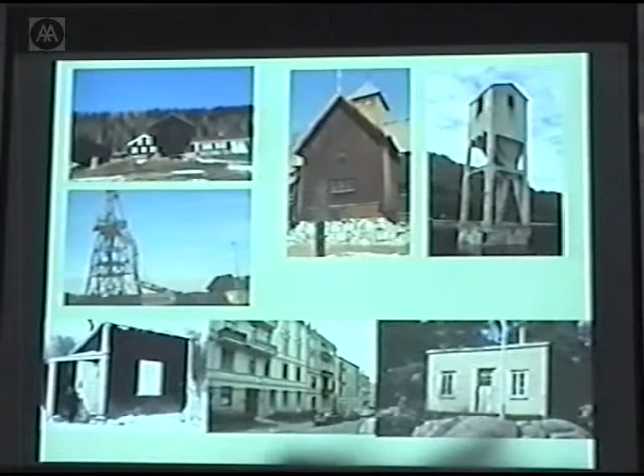I was told that I should tell you something about my background when I was going to give a lecture here at AA. And this is some of my background. On the lower line you see the street I was raised on, in the middle our family's winter cottage, and on the right hand side our summer house.

The other structures and buildings are buildings passing on our way to the summer and winter house. It's a traditional old storage house on the top left, a so-called stabbur, and a stave church in the middle. These two other structures are industrial structures. The one far right is a concrete outshipment silo in some way, and the other one is a broken crane.

Many of these projects I'm going to show you have relations to this old building tradition of Norway. It's a long tradition of building structures that can be torn down, moved to another place, and put up again without much harm.

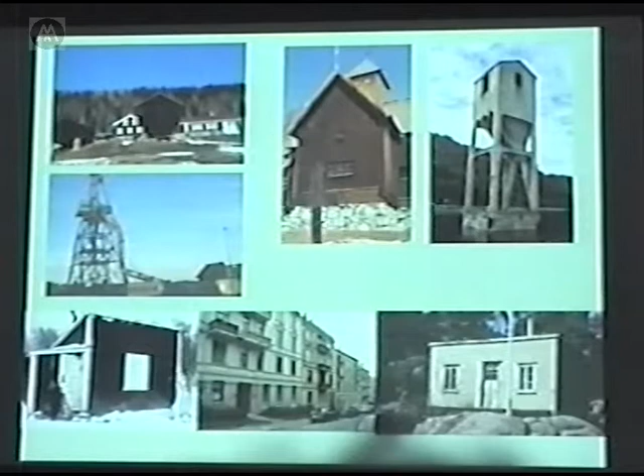After finishing school, I worked in New York for Bernard Tschumi. I came to New York as a photographer's assistant, worked at night and tried to get work during the daytime. And I started at Bernard's office.

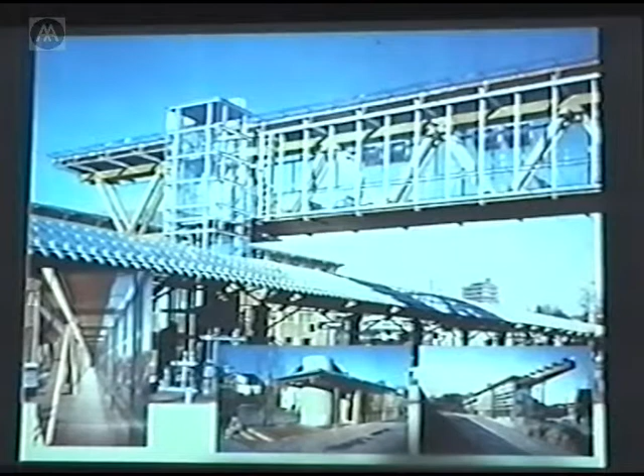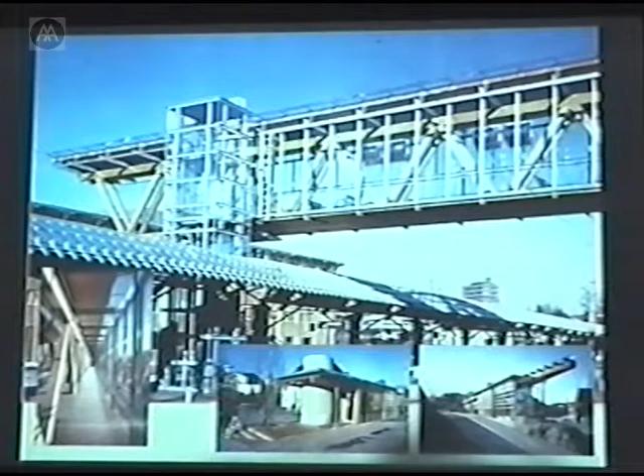Then I went home to Norway again and started working with Niels Torp. You probably know him from doing the headquarters of BA out at Heathrow. At both places I actually worked on communication centers and bridges.

Some students work for us, and different artists work and collaborate on different projects. The way I'm going to go through the projects is as a trip from the forests around Oslo and down to the harbor. It's a kind of sampling of our projects into sites that we think of as potential for building new buildings in Oslo.

It's a kind of clean cut through Oslo, from the forests surrounding the city down to the harbor at the end of this fjord. We're starting off at an old monastery up in the woods, and our idea is that we want to show that new pieces, new architecture, modern architecture, has to be put between and together with and besides the old stuff.

This is a kiosk, kind of a temporary building. It looks kind of temporary, but our suggestion is to make it more contemporary. So I'm going through some projects that we make as suggestions for these buildings and sites that we pass on the way.

This is a cinema for approximately 50 people that's been touring Norway, visiting 70 cities and places all around the country. It's hosted and run by one man who has a lorry where all the technical equipment is put in, and then a dome-sized pneumatic structure held up by air under pressure. It's very quick to raise, taking about an hour, and the same for packing it together.

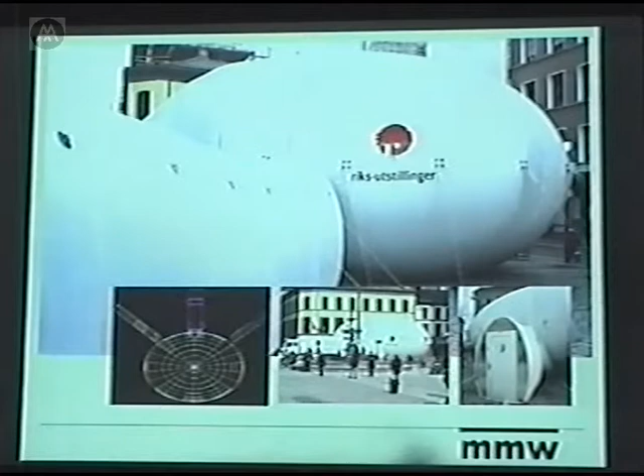Here is another project, an exhibition of our office projects in a gallery, where you're actually just visiting this pneumatic structure and never in the gallery itself. All our projects are projected on the inside of this fabric. This was the first project I did in collaboration with Helly Hansen, the cloth and seawear fabric company in Norway. In the 60s they made a lot of these pneumatic structures for tennis courts and skating rinks, but they hadn't been doing it since I started collaborating with them on this exhibition.

That exhibition actually transformed into a stage set for a new ballet with Norway's first prima ballerina, and we used the structure as a place to project pictures taken by a famous Norwegian photographer. The ballet was also going to tour Europe, so it was important that the stage set could be fitted into a suitcase.

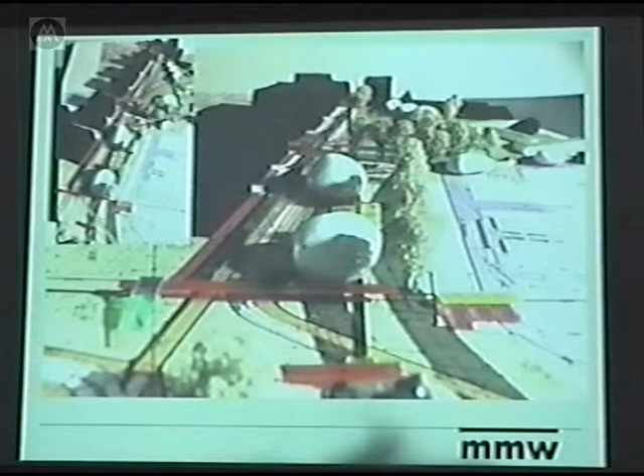This is the latest pneumatic structure we made, a smaller exhibition for the capital of Oslo. It's a kind of stand, a presentation of Oslo's environmentally friendly issues. There are six issues, and they are touring Europe with this exhibition. It's a projection of a video film on the bottom, and you have different tools you can operate inside this ball, with a sound connecting to each theme.

So these are our proposals for the new kiosk.

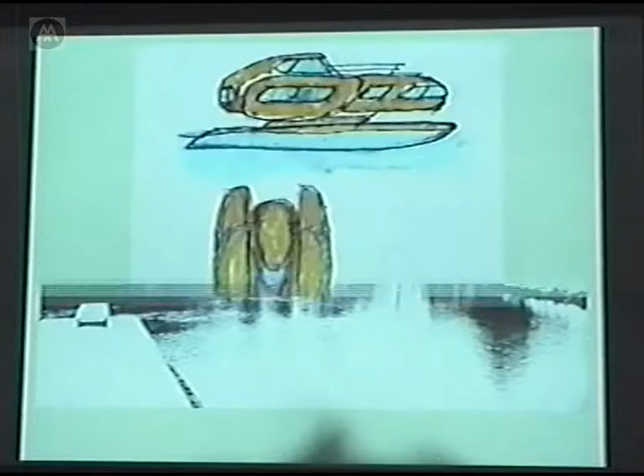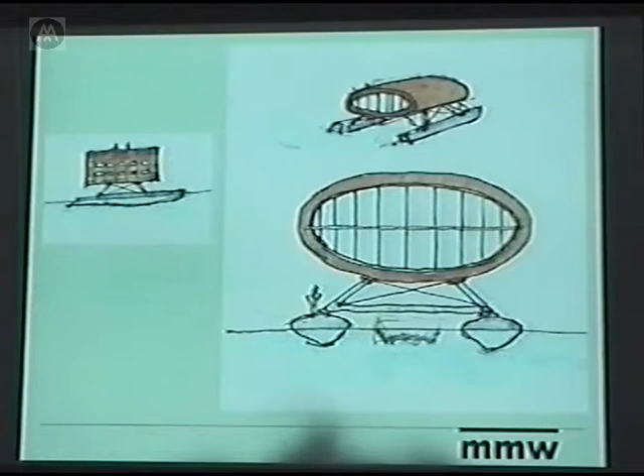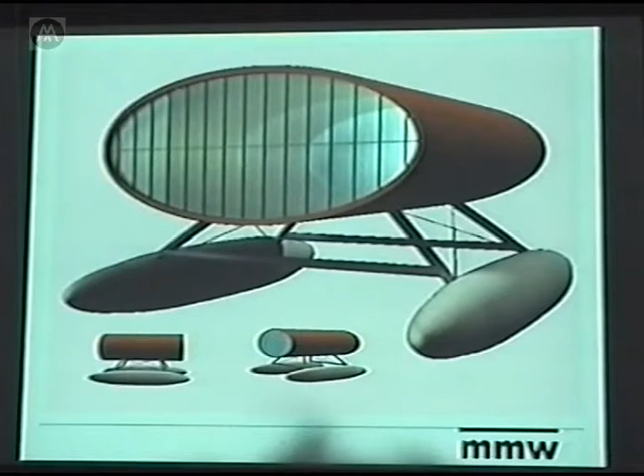Another stop on the way: it's a dam with shallow water. We did just sketches to provoke, since there was a discussion on what to do with the harbor area. We also made this project for a text writer at an advertising firm, who is trying to raise money to build this vacation summer house. It's a steel structure on pontoons, and this is how it should fit at the dam.

Gas stations have been a great discussion in Norway. Several people really want new gas stations to look like old stave churches or stabbur-style buildings—very traditional—as a way to fit the gas station into the environment. We think of it a little differently, and I'm going to go through another project, an advertising agency where we dealt with shapes and forms that I'll show you.

This is an advertising firm called Inferno, and the concept for their new offices is taken from La Divina Commedia by Dante—a story, or more like a vision, that Dante, the Florentine author, had.

He's on a journey where he comes to the gates of hell and looks down, as you can see from the top here—a huge shaft that goes in circles down to the center of the earth, where Satan lives. As he's standing there looking down, he's taken down by three wild animals: a lion, a panther, and a wolf. They take him down to the first step, where he meets his guide in hell, Vergilius, a Roman author, who leads him through this trip in hell.

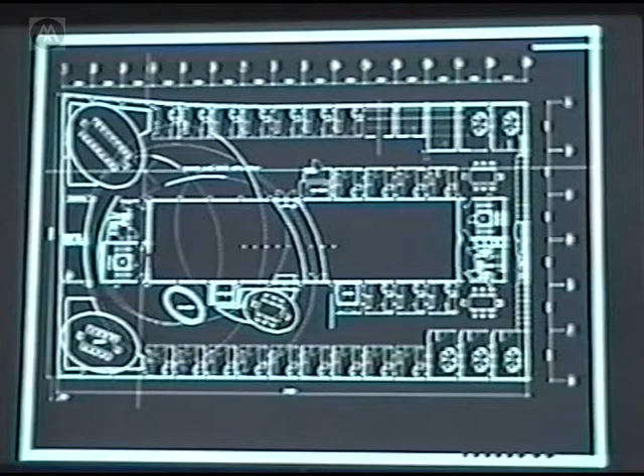This was supposed to be an animation, but it seems the computer won't read it, so I'll just describe the project. This is our first proposal for the meeting room, called the Lion. It's free-shaped forms.

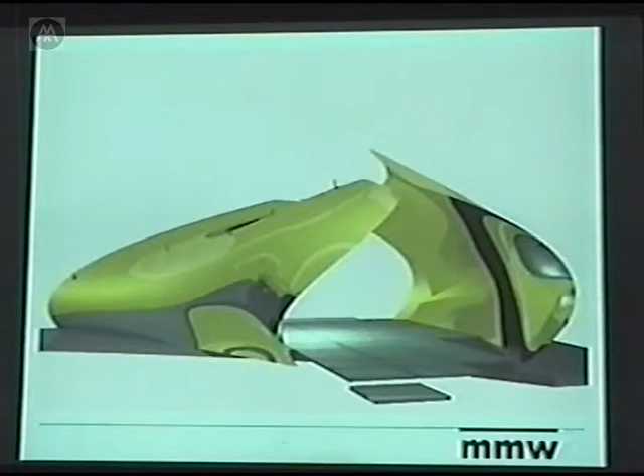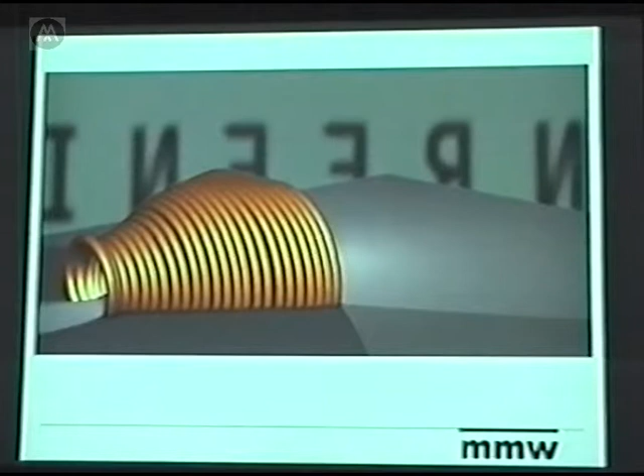We've been working on this and trying to establish it in fiberglass or carbon glass, but now we're working with Helly Hansen, trying to sort out these forms as a tubular pneumatic structure. Also, this was going to be an animation, but it doesn't turn out to work.

Here you see a plan and some sections of one of these meeting rooms. It's a tubular structure that goes all around the room, and the room is kind of open just outside, and they will have the presentations shown on the back wall there.

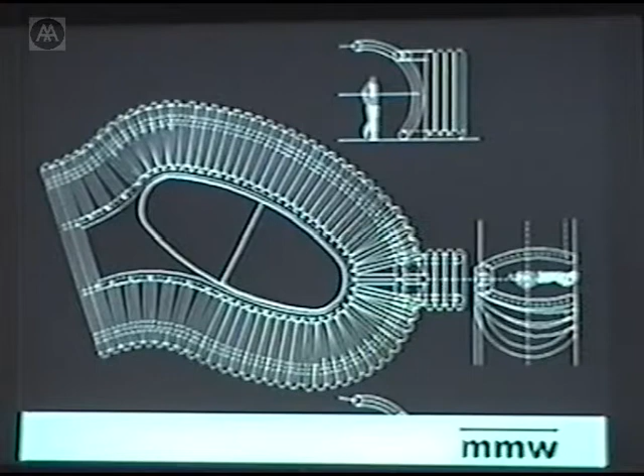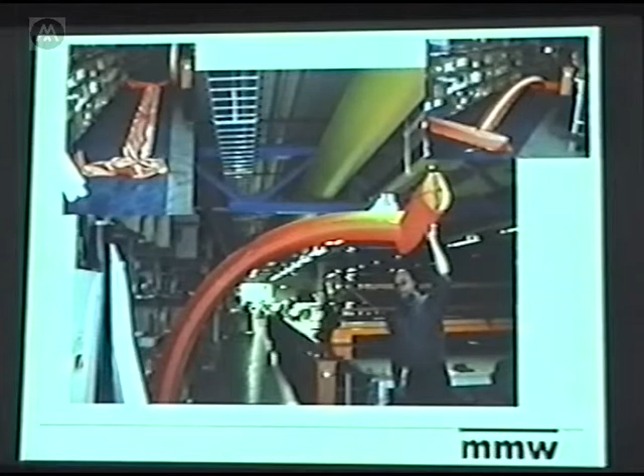This is from Helly Hansen's workshop, where we're making models of this construction—this is a part of it. I think this is the Lion. It seems all these rooms are going to be pure white, with projections of a lion, a panther, and wolves.

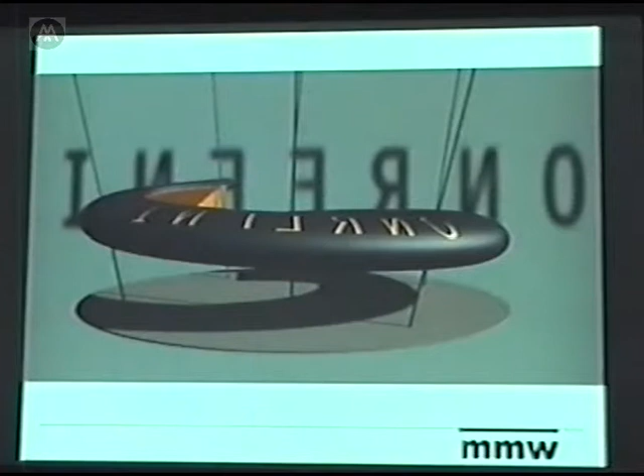This is Vergilius' spot. We're designing clothes for the receptionist, and she's going to be a kind of guide through the agency.

This is a structure in wood, being made now by IKEA's special workshop. It's covered with soft foam, and we've welded rubber around it. Here you can see the working drawing—it's going to hang from the ceiling in the room.

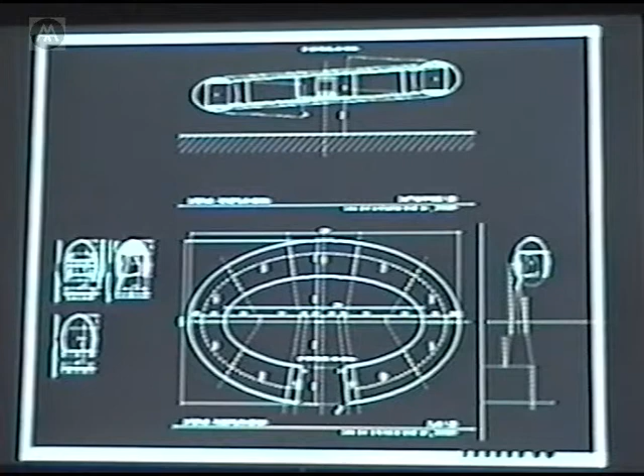These are some drawings of the cellular offices. A very important thing for this agency was that everybody wanted to be able to play loud music, smoke, and shout on the phone. So everyone has their own glass box, with a space between them of approximately 30 centimeters. All these individual boxes, and all the way along, we're going to have different exhibitions of artists and installations.

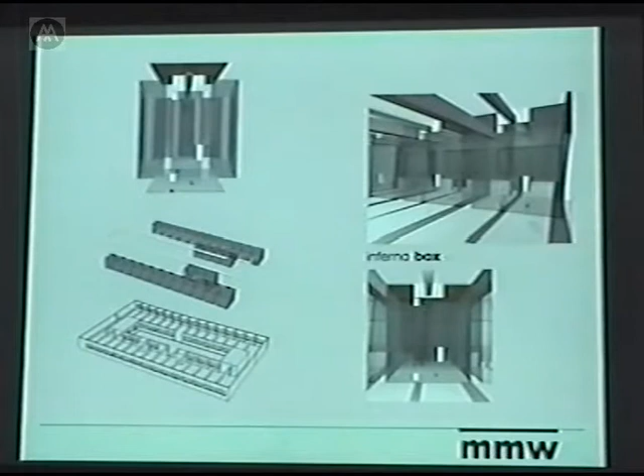Here you can see, this is from the site yesterday. They started to put up these glass walls, and here you can see the exhibition space.

Back to this gas station on our way—our proposal is a more free form, much more connected to shapes and forms that we see in cars.

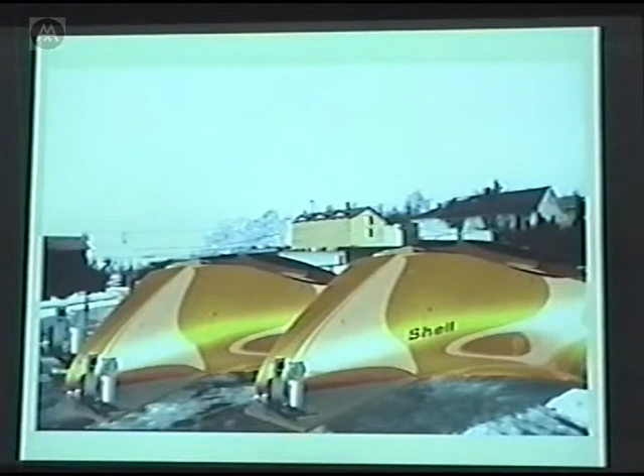I'll show you a project we're working with right now. It's a private house from the 60s, and the owner is a collector of modern art, especially modern sculptures. We found this model that was the original idea of the architect.

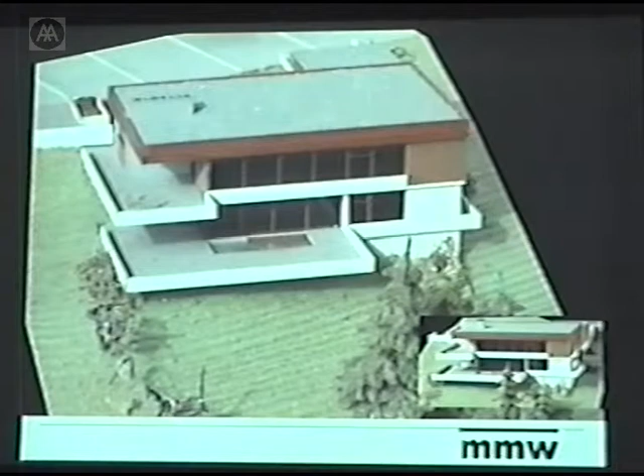Today it seems quite different from this model, but what we've done is take this old house and clean it up. We re-established this pool outside and made it a little bit longer.

This just takes a little bit of time. It's a concrete basement of this house, with a wood structure on top.

Inside the house we've established two vertical elements. One is where all the bathrooms are; the other is where the fireplaces are. This is the first vertical element—it's a steel structure—and the other element is here. All the other area we're keeping quite open.

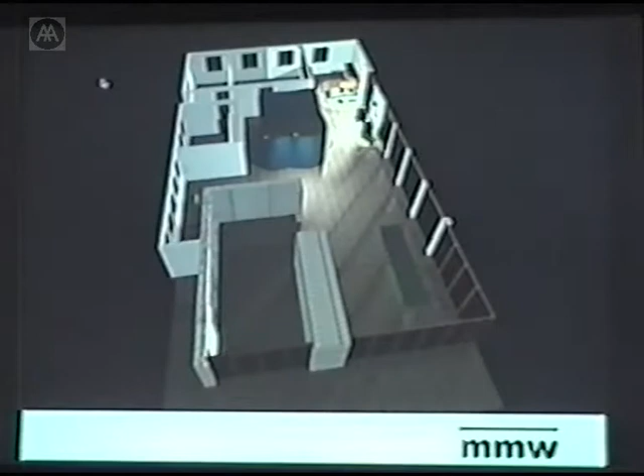Yeah, this is now made as a steel structure, and we're taking this structure also through 3 floors. Sorry, it's something with just these pictures.

Today we have established this vertical element in pure concrete, and this is where he's going to have his stereo equipment, for sound and all kinds of AV projections. Here you can see the plan again. It's the entrance area, you enter over a shallow pool, and you have 2 small bedrooms on the side here, and here is this bathroom element, the master bedroom, and the kitchen.

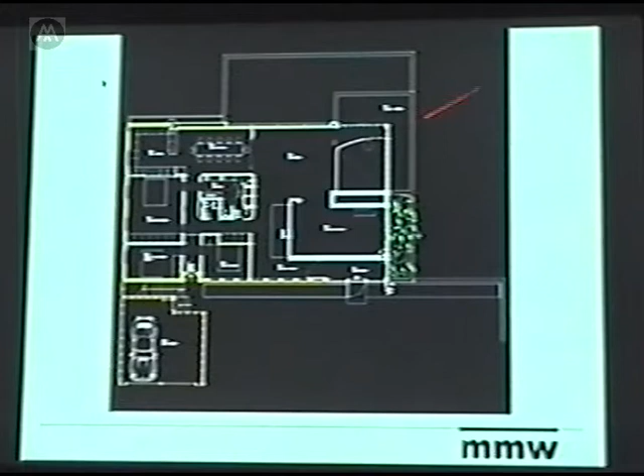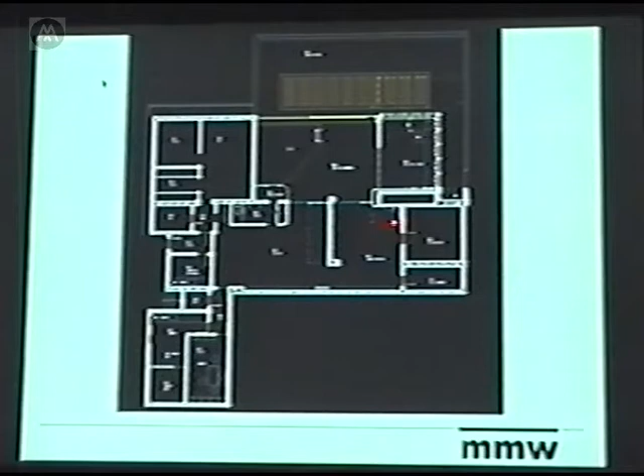Then it's open all the way here and also down to the winter garden, and it's a small terrace out here. We've been walking 1 floor down, and as you can see, this bathroom element is situated at the same side, and there is a pool room, and here there are the TV room.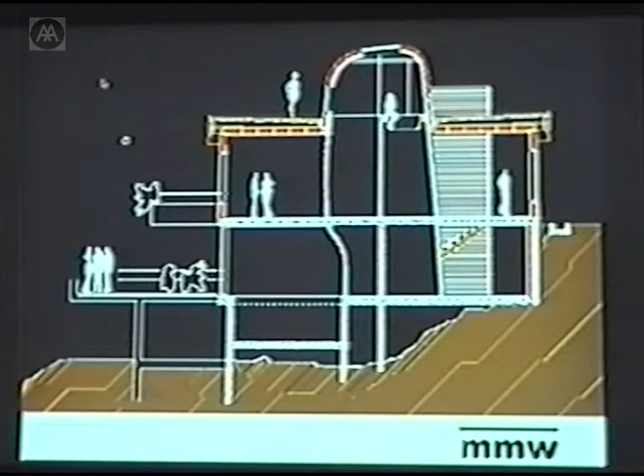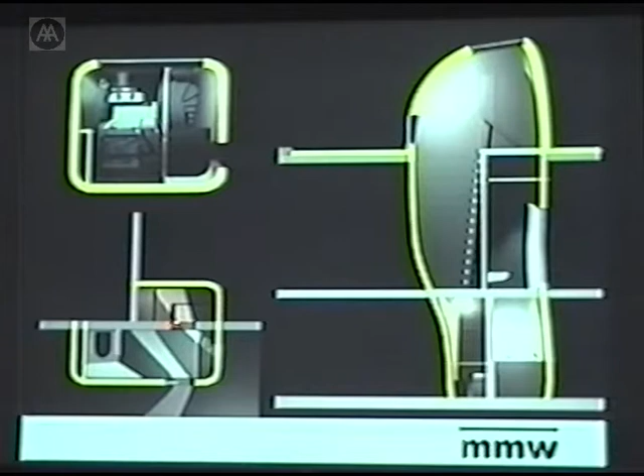The section of this shows that this vertical element is more like a freely shaped structure, and here we have this concrete element, and we establish a roof terrace on the top. So here you see the top plan of the bathroom element. Here we are in the basement, and there you have the section of it.

It's more like a head or a mask or kind of structure just put in this old house, and it goes over these 3 floors. It's a structure with the construction mainly in steel, but it's cladded inside with concrete and tiles.

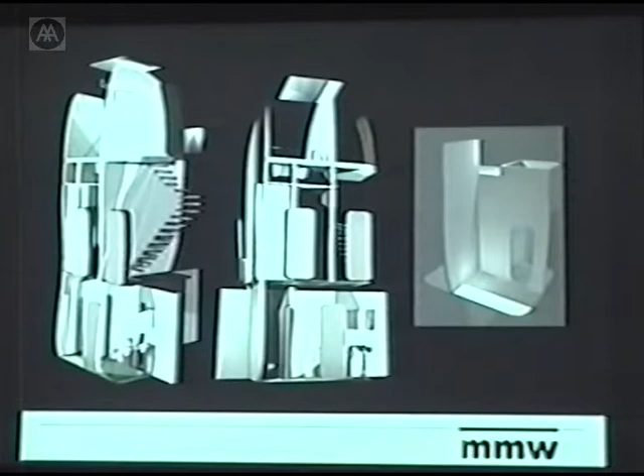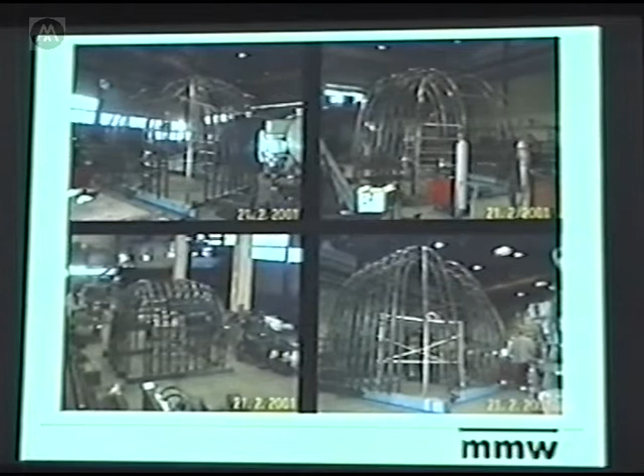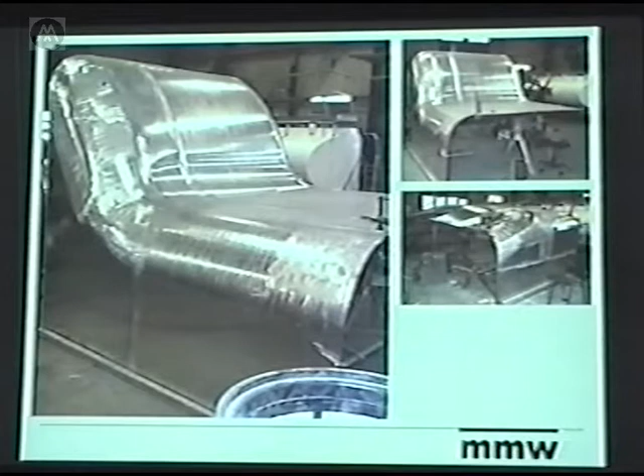You can see from the workshop where they're finishing up the steel structure. This is the part that is going to be on the roof, and this is the part where they're finishing up right now the aluminum cladding on the outside. This is for the basement.

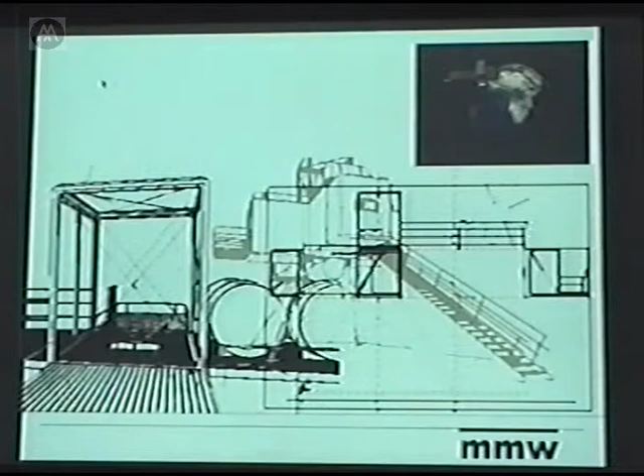This is the container house, as Pascal mentioned. It's called Filtex, F-I-H-L-T-E-X, that resembles the different types we have of the house, the plans.

It's a structure made out of two regular steel containers, one 40-footer and a 20-footer. This is the 40-footer that goes through all the way, and the 20-footer is divided in two, and we have one on each side here.

Then it's added a cube in the front and a cube on the top. On the back, as you're going to see later, it's added a bathroom. It's a structure connected to the ground by actually 4 bolts, screws that connect it to the ground.

Inside of the structure, it's only painted. This is also a project we've done in collaboration with Helly Hansen, so it's made like a kind of all-weather jacket for this house, with insulation on the outside and a skin for the weather. And the way it's constructed is very much like a jacket or a shoe or a raincoat, as by the terraces.

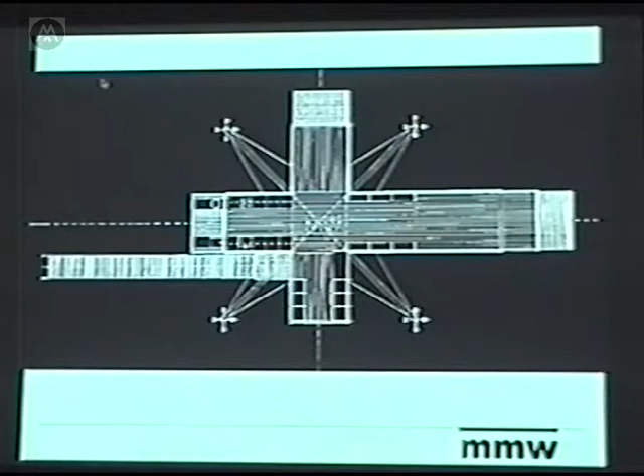And the bathroom is with a shower and a toilet and a sink. And in the middle here you have access to the terrace, the roof terrace.

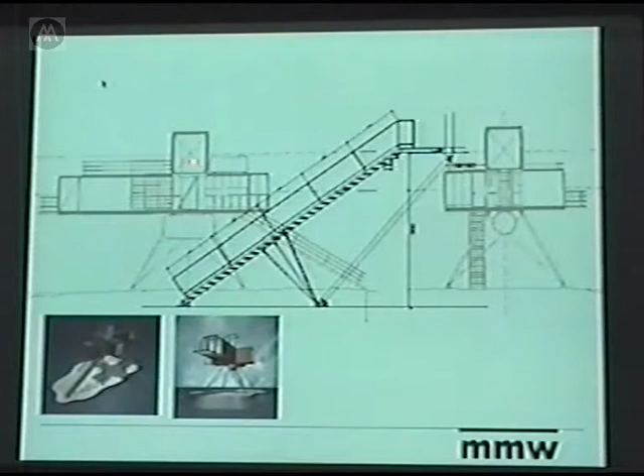Yeah, here you see some sections of the construction. It is a structure that doesn't need to connect to anything actually. It's tanks on the top of the building, one with water and one with gas, and on the top here on the tower it's solar panels, and you have the sewer down there. Different kinds of systems could be used.

I mean, the way we've used it until now, it's been connected to electricity and water, but it's a freestanding building that doesn't need any infrastructure. And the stairs is just connected on the top here with one screw, which means it can be put in different terrains.

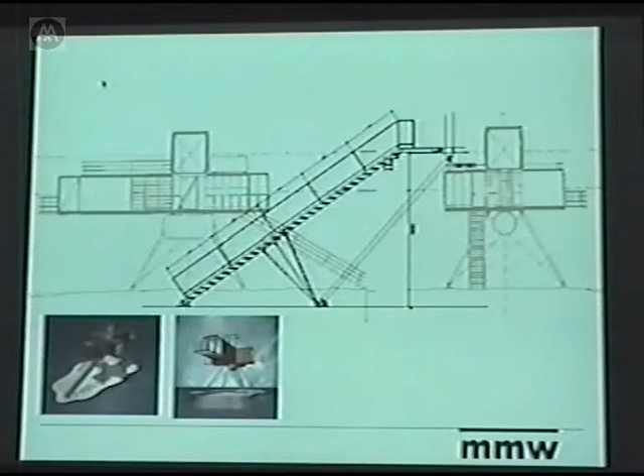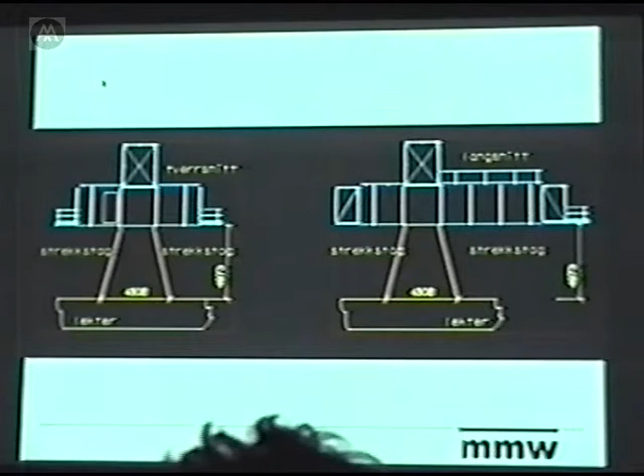Yeah, these are some drawings from when we had it on sea. It's been launched on - what do you call it in English - a lighter? On a boat, on a flat boat, and then we needed to strengthen this up a little bit. So it got this. It's now legal to sail with this house.

We did have to try to launch this house to get it built. I got a youth loan from Oslo, the city, and I thought I was going to be able to build the house, but they had some strict rules. For instance, a living room can't be as narrow as this living room, and you also have to own the site to get a loan. So it was difficult to get this built, to establish money for it. We did a presentation in the magazine with some well-known politicians, and when they didn't want to move in, some other guys took over.

But we got this built. We were invited to an art fair, an art biennial, in the southern part of Norway, and it turned out that we were sponsored by different people delivering building goods and building materials. We got Helly Hansen as a co-op partner, and we got this huge shipbuilding firm Kvaerner to weld the construction.

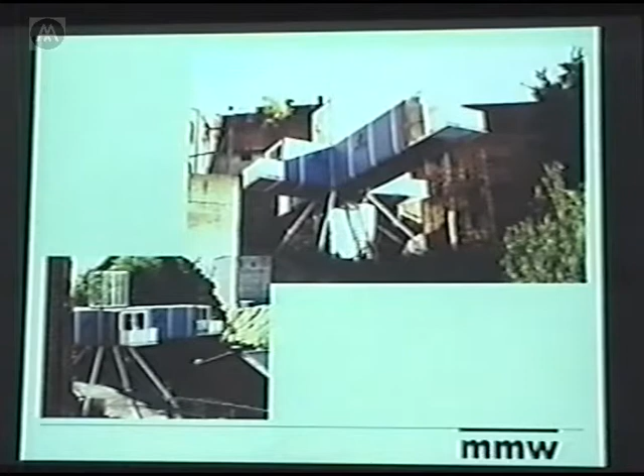Here you can see the coat. It's made up in parts with zippers and Velcro, which means it's possible to take it all apart and store it inside the container when you are moving.

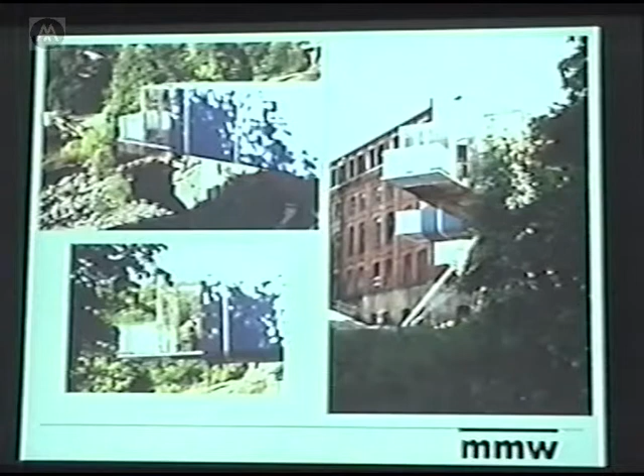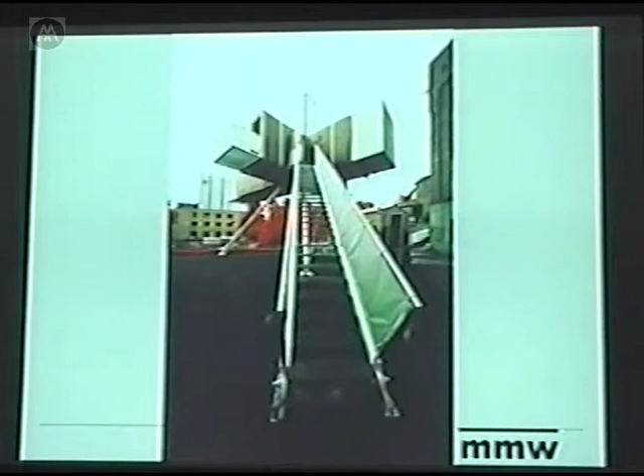The tower on top also has a kind of technical function, because during summertime it gets quite hot inside a steel structure like this, and it becomes even hotter on top of this glass tower, and that makes it work as a kind of pump. When you open the doors there, you suck out the hot air from downside, and it becomes, well, not maybe chilly, but it clears the air.

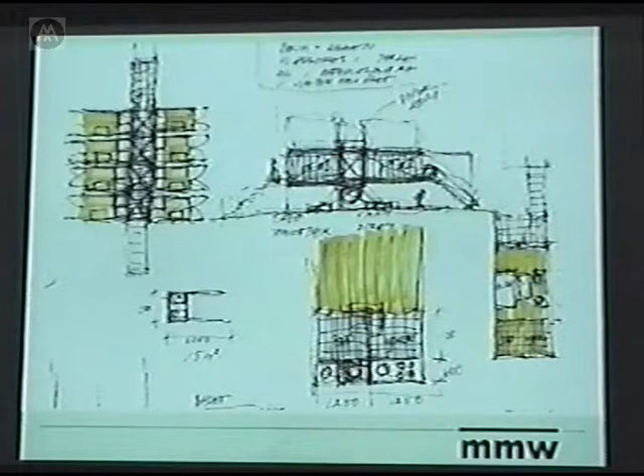We were invited to make a proposal for a refugee building for individual refugees in Oslo, and it's more or less based on the same principle as Urbatex. It's smaller containers, and it's one rig that they're connected to all the way, and it's a structure that can easily be moved when either the refugees are going home or they want to live somewhere else. Mainly they want to live in the city, which means our proposal is to take and use spaces like this.

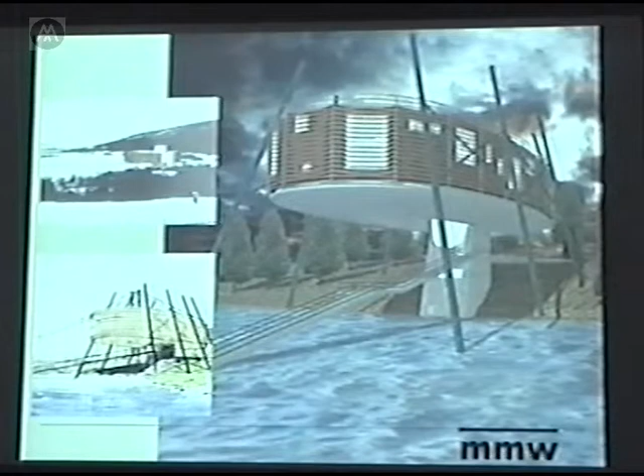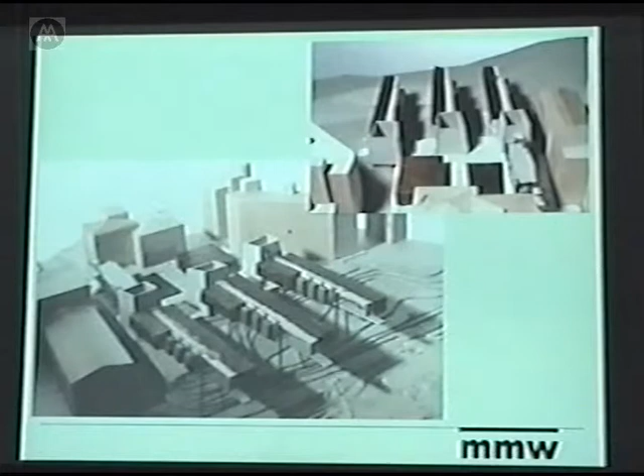This is another project. It's a school. It has the same principle, a platform, and the main part of the buildings are up in the air, so the students in the school are all here.

So this is the proposal for this site, to make this sloped area free for use and build in the air. Here's this guy again on the way down the road.

A park where they have actually made this park quite nice. There's an artificial river built in a way in the park, but it's very two-dimensional in a way. So our proposal is to build some kind of bridges, more three-dimensional pieces in the park.

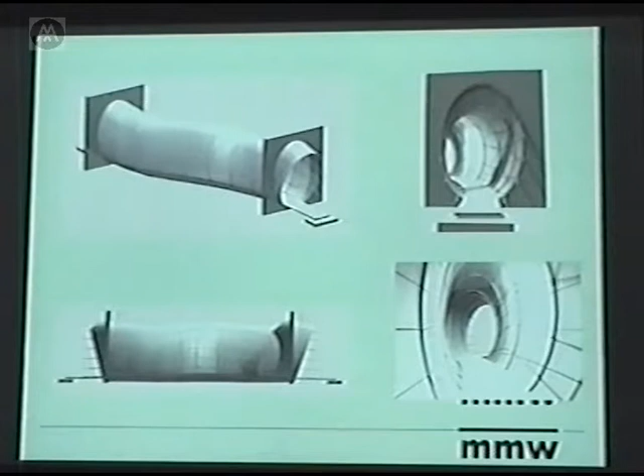This is the bridge from Inferno, and this is a tunnel from Time Machine, the moving cinema. These are proposals for the park: translucent fabric made by Helly Hansen, and steel structures.

An open gap between two buildings, and there's a mountain on the back here that has a history of silver mining. It's a story no one actually bothers much about in Oslo these days, but this mountain on the back is really penetrated by a lot of silver mines. So our suggestion is to establish rooms inside this mountain.

This is from a stage set that we made for a Norwegian short movie. It's a science fiction film where we used both Time Machine, the cinema, and these exhibition pieces. We used three or four of these thematic structures that we built, and then put them together.

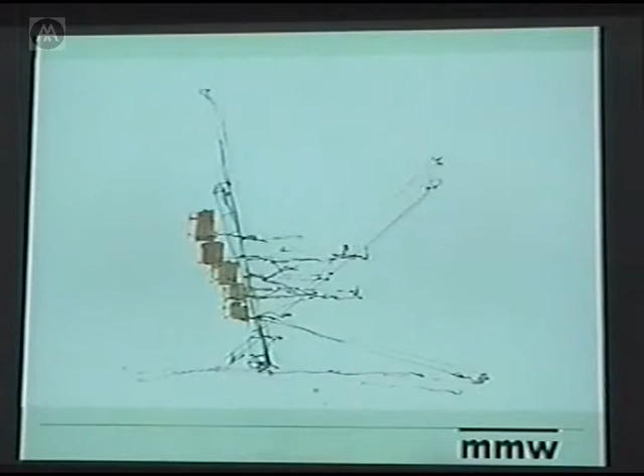And this is a sketch for another Millennium project we made.

It's an exhibition and gallery. It's a gallery at the top, maybe with a cafe or something, and it's an open steel structure all the way down with cubes for exhibiting different kinds of art pieces and design pieces.

What is it called? The issue for making this was that the idea was that Noah was going to fill up his ship in year 2000, and these stuff hanging under the ship were going to be examples, good pieces to carry along.

Yeah, another AV that doesn't really work. Sorry about that. Then this is our proposal for the area, using these exhibition sites as living and dormitories.

Yeah, a huge parking lot that hasn't been built here for 50 years or something. It's just been a gap. And we thought of putting this project here.

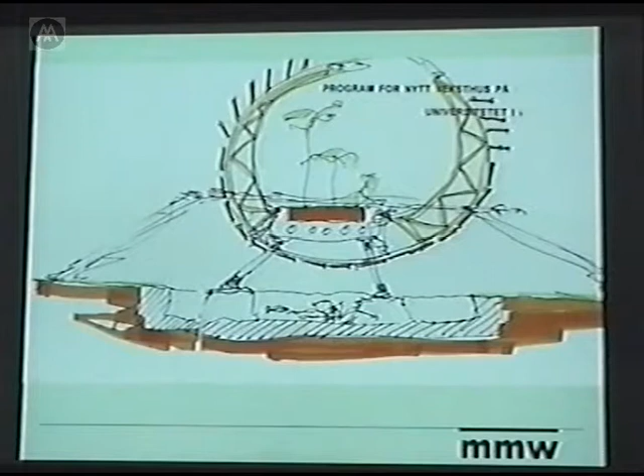This is a sketch for a greenhouse that we made some other place in Oslo. It's both concrete, steel, and wood construction. The idea was actually to build a seed that was the beginning of the botanical garden in Oslo. One seed from a palm tree from the Canary Islands started this botanical garden.

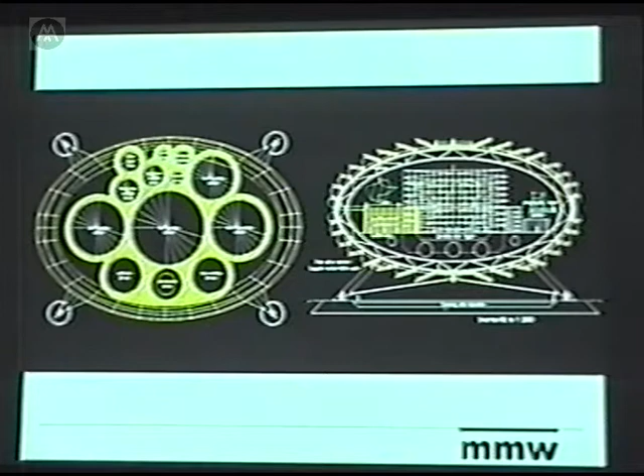And our proposal was to build this seed and establish just one floor in concrete with different greenhouses all the way around. These greenhouses were, the structure of them was built up as a DNA molecule, and we suggested that it was possible to open the structure all the way around with wood panels.

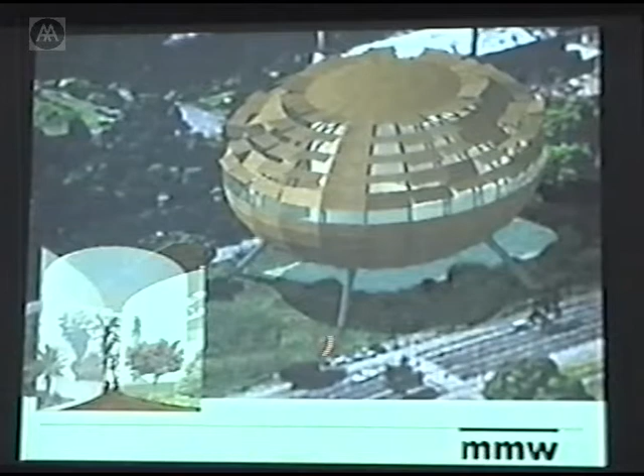Yeah, here you can see it from the inside with these greenhouses and the seed standing on four legs in the garden. And here it's in the middle of the town.

Yeah, this is a poor social housing house further down the street. I'll show you another project that we made as a proposal, a rehabilitation of an old Esso motor hotel.

What we do is the hotel is in the back here, and what we do is we establish a new facade in the front and make a diner here, and we put on top a new conference room with a VIP conference room on the side, being able to look all the way to the fjords.

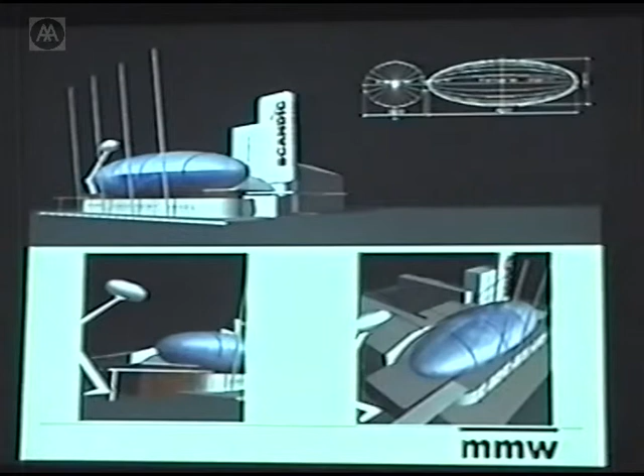This is located very close to the highway, where there's a queue in the morning. People are standing in the queue into town, and in the evening they're standing in queue out of town. And we are—

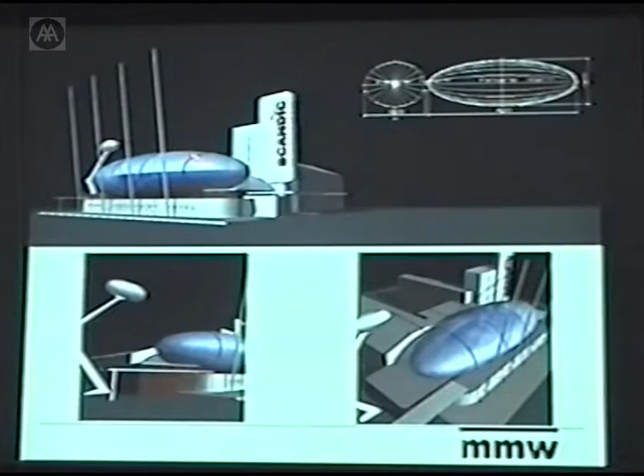What is it called? The director of the hotel is trying to get a radio station to run kind of live performance stuff from here, which can be projected on the pneumatic structure.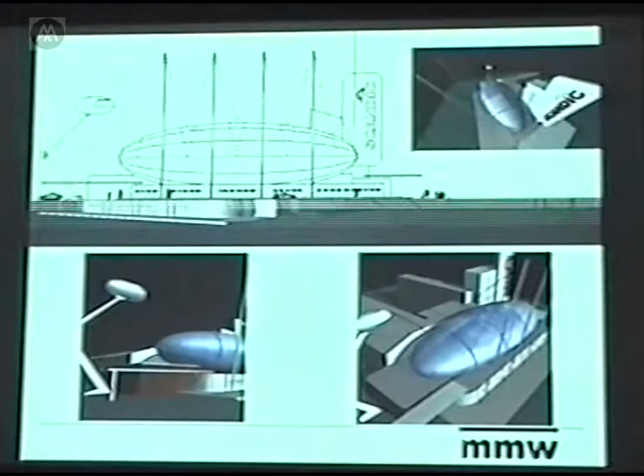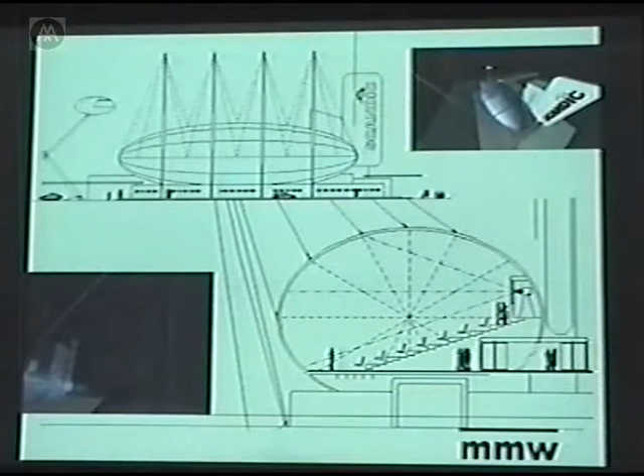Yeah, or at this moment we're working on this as a conference room for the hotel. Yeah, this is from the site.

The same ideas we thought of for this house: a new facade in a more furniture-like material, glass facade, and then we put the structure on the top.

Yeah, this is a quite poor area. As you can see, this is not the best part of town, the way we've been walking down. Right here, a lot of drug addicted people are hanging out, and a lot of young people are also hanging around in the area.

And what authorities have done is they put up a sculpture here of a moose, and that's it. So here, this is a bus where they're handing out soup.

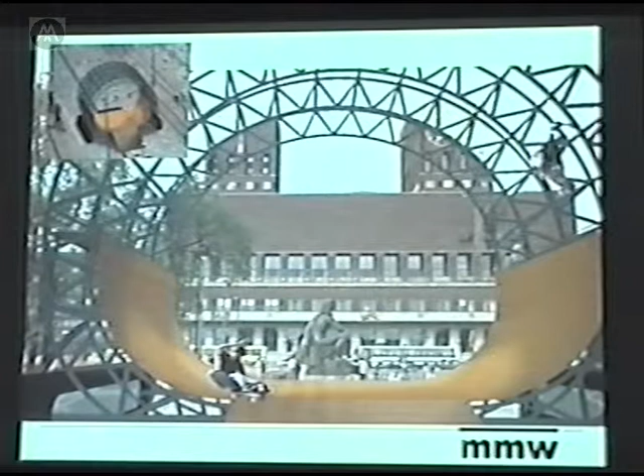So this is a proposal we made some years ago for the town hall of Oslo. The politicians had made a very nice and very expensive new

stairway into the town hall, and of course a lot of skaters really appreciated it as a way of running with skateboards. So it was a quarrel between the politicians and the skaters, and they used the police to force them away from the stairs.

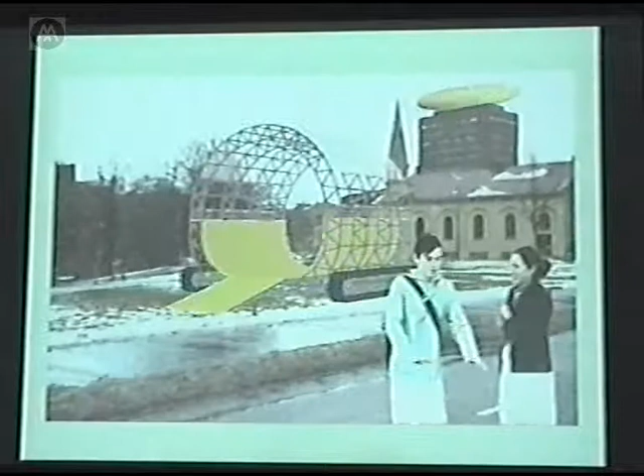So I suggested giving them a ramp on wheels, and when the politicians came too close, they could just wheel it around somewhere else on the square. So we're suggesting to put something like that, a movable structure that gives something back to an area like this.

Yeah, these are Oslo's only two high-rise buildings, and everyone thinks this is a terrible building. This was the first that came up in the 60s, and this came in the 80s.

A lot of people want to tear this down. A lot of people think it's too high, think it's too wide, and it's been a lot of discussion on what to do with it.

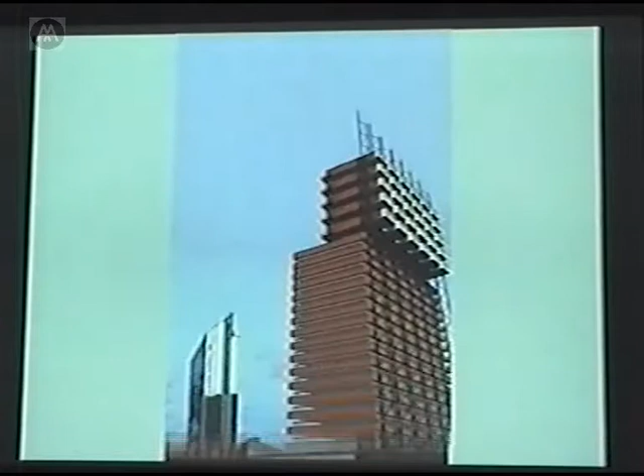Today there are plans dividing it into two and making it look smaller. Our suggestion is to take this office building and turn it into housing. It's a very nice plan that really goes up to.

And then we are down at the harbor.

Now they're building a new opera building down here. But it's very difficult to establish anything around in the harbor. The harbor authorities are very strict on their activities, and the only way to get anything done here is to actually build in the harbor at the water.

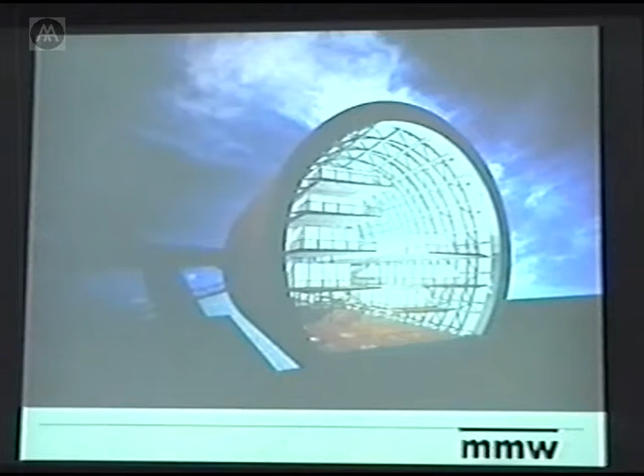This is a project for a new Norwegian embassy. It's a steel structure, a huge tube, and the steel structure is covered with wood. The location is somewhere on the equator, and what happens is that salt water from the sea is pumped on top of this structure, and the water is falling and covering all the structure.

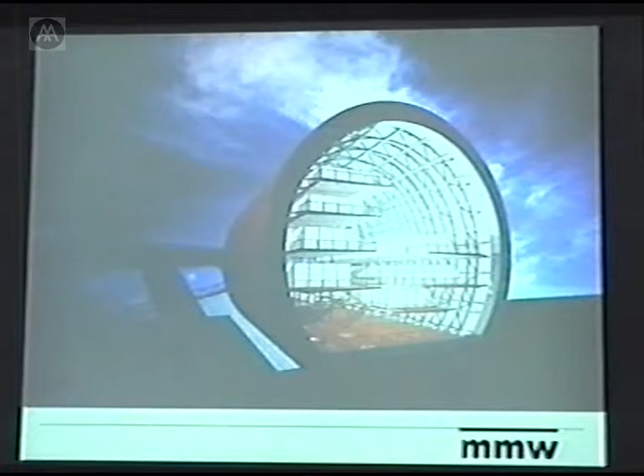The sun is shining on it, and what happens is that the heat from inside is taken outside when the water gets into it. Inside this structure, the whole embassy is organized like containers in glass. The embassy can be used as exhibition space, as a space for emergency, and it's quite flexible inside. It's a few parts put together in different shapes.

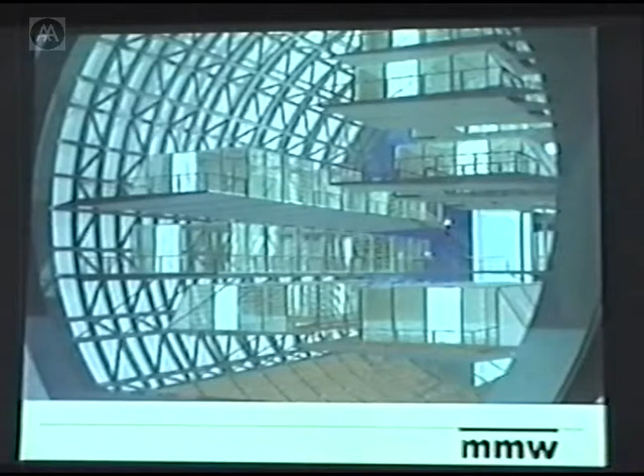And the idea is that this building is built in Norway and sailed to wherever it's going to be used.

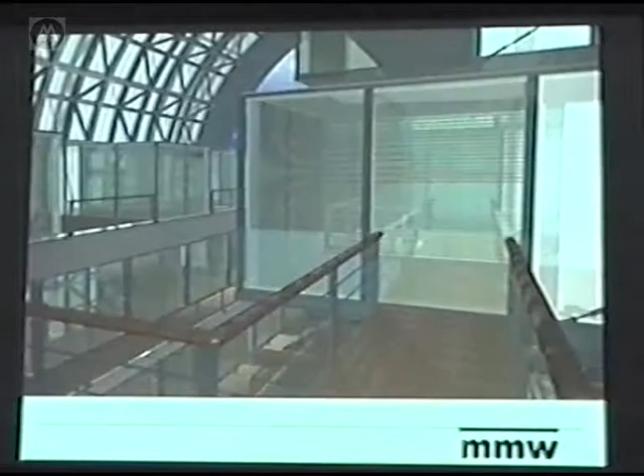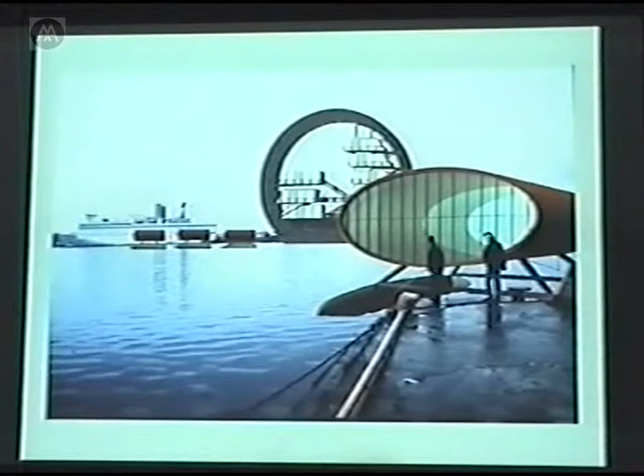I don't know if anyone has questions.

For me it's interesting that it looks like, at least, I mean of course there are a lot of projects which are not realized, but at least some are realized and some have the chance to be realized, which I think is, compared with London, pretty good. Also, like in Germany, it's not done very much, only for big exhibitions. I think what is very nice in the work is that even the biggest structure has a small scale, a kind of human scale, which looks more like furniture of the city, on a bigger scale, furniture in a household. So it gives another relation to things.